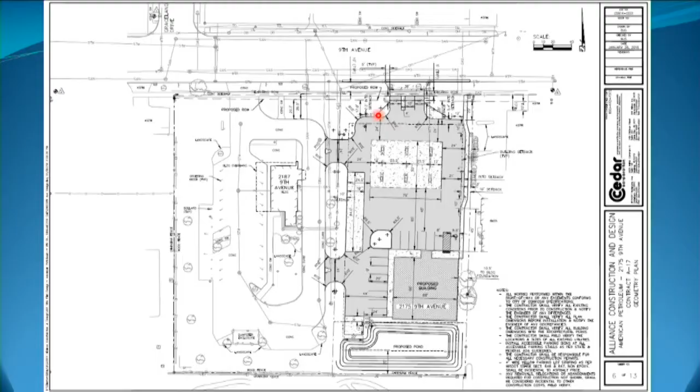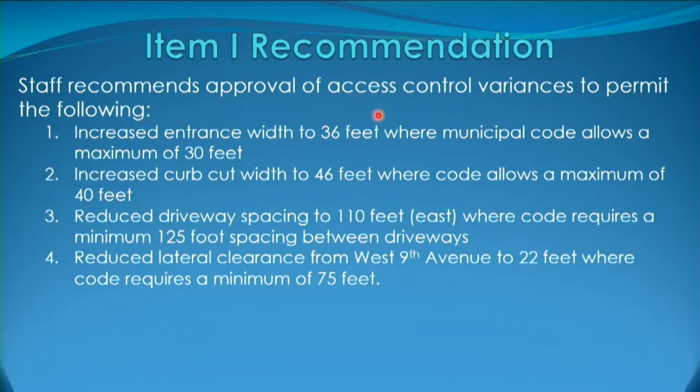Motion to approve. Second. Any discussion on the motion? Seeing none, call the roll. Hintz, aye. Weigert, aye. Perry, aye. Propp, aye. Borsak, aye. Bowen, aye. Wojtek.

Aye. Motion carried. Okay, moving on to item number 2, residential design standards variance to allow window area reduction at 1333 West Bent Avenue. Thank you, Mr. Chairman. Welcome, sir. So this item actually came before the Plan Commission before, at the January 2nd meeting this year. At that meeting, the applicant had proposed reducing the size of the windows. We as staff had recommended denial of that proposal, and then all of you at Plan Commission asked us to work with the applicant to come up with something that could work for both the city and the applicant.

So here's the subject site in blue, single-family residential, SR9, I believe, and everything immediately around it is single-family residential. Get a sense of it right there. And she was looking to modify the size of the windows on the north facade facing Bent, and then on the west facade.

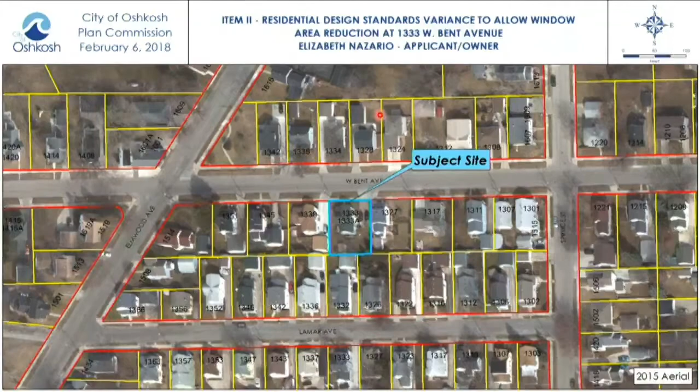This is kind of some images that she submitted, showing the house and then the windows in question. These are some images that I did. So this was the current state of the house here. And then what we were thinking about here, so you get a sense of the size of the windows, and there is a decent amount of reduction. It's certainly noteworthy here. Over here, you notice, if you look, that the window immediately to the right of the door there would be gone. And then this window here would get smaller also.

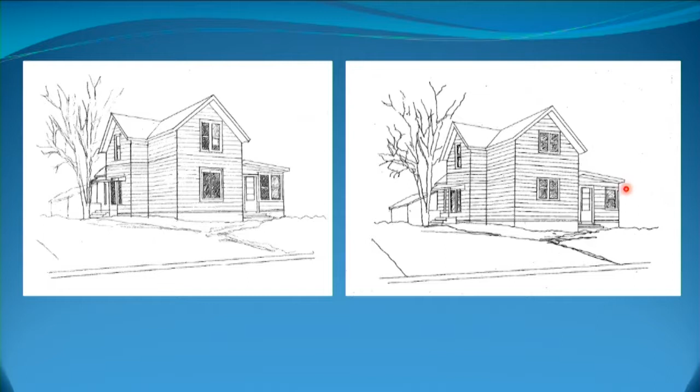And then on the west side, I did not do any drawings of that, but she would have 3 windows of the same size as this one here, double hungs on the west side immediately on the other side of that facade there. These are some existing photographs, or showing existing conditions, I should say. So you can see the exterior there, and then some of the work that she had started on the side of the house here. And then inside here is actually what would become the kitchen space.

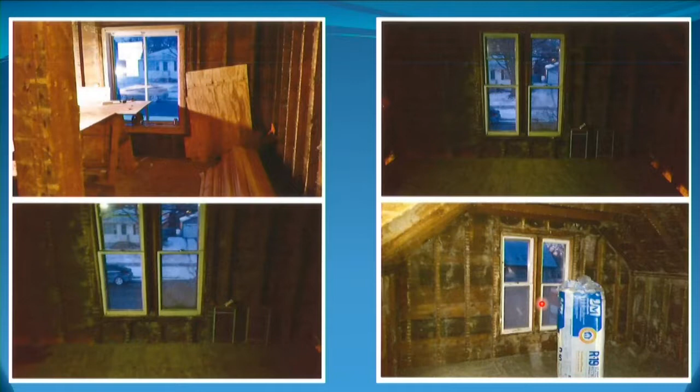So this is the existing, I believe it's a sliding window there. And she wanted to do cabinetry here, raise the sill height of this. And so this window would probably be a similar width, but the sill height would go up a little bit to allow for that cabinetry there. Getting another sense of it there. Same kind of type of image here, but off from an angle there, showing that kitchen space. Obviously there's some materials up here with the work being done, but you get a sense of the size of that window, the sill height there. It's not very far off the ground at all.

And then moving upstairs to the bedrooms, which would have the other window that would be reduced. You get a sense here of the height of the sill there. And she was concerned with the safety aspect, you know, grandchildren potentially climbing up and easily getting to that sill there. She wanted to reduce the size of those windows there and replace those.

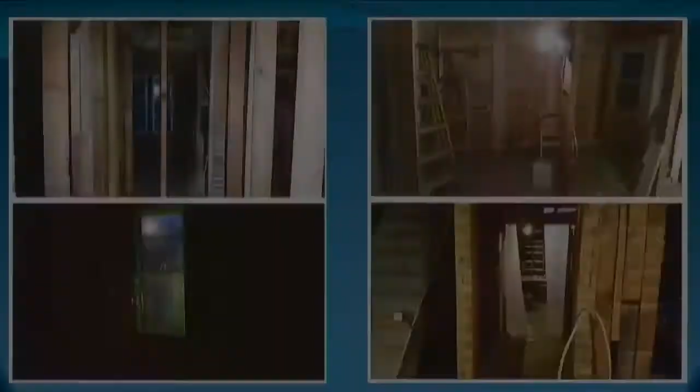Some more images here. There is a central stair that actually restricts what she can do. I wish I could get this cursor to work a little bit better.

So that's looking through this, what would become the stair here. What is the stair? It's just framed here. Everything's been stripped down inside the house. So the sheetrock is gone, the insulation is gone. You're looking towards the bedroom on the second floor here, the existing windows that would be reduced. And then this over here is actually what would become a dining room. And so what looked to have been a porch is now proposed to become a dining room.

These are framed out areas for the 3 windows here, double hung. And then this would be the existing double hung there. And they would all be the same size, same sill height, etc. And then over here, you get a sense of that stair there. Like I said, it restricts what she can do. These spaces on each side of it are pretty constrained. You know, defines those spaces. And we figured that the most logical place for the kitchen would be the front of the house, based on the floor plan. I don't have a floor plan drawn here, but hopefully you can get a sense from the images.

Some more images here. There's that stair from another angle. And then she was going to make this over here a mudroom. I think that's on the east side of the house there. And then you're looking at the west side on the right here.

Here is an isometric view of the kitchen that she is looking to do. So this would be that front facade of the house here. This would be the side east facade here. The window would be obviously in this space here. She might lose a little bit of cabinetry, but we figured that that casement style window would allow for preserving the architectural integrity, but then also allowing to raise the sill height on the first and second floor. And then over here would be the dining room.

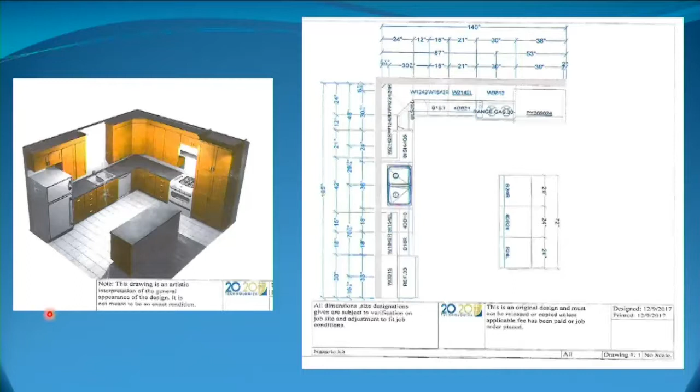This here just kind of hits at that egress consideration that we had to think about. So if you look on the left here, there are some double hung windows, and you notice that basically a 20 by 24 inch minimum clear space would be required. But on top of that, you have to have 5.7 square feet of clear space. So simply having, say, two 24 by 48 double hung windows would not be acceptable for fire egress for the second floor. You'd have to go much wider and much taller in most cases to get that sash to open up to create a space that is 5.7 square feet in area.

If you did a double casement window, or a French casement style window, you could have a 48 by 48 inch opening, which is not shown here, but 48 by 48 inch rough opening where both leaves swing out, and you could get this clear space that's required much more easily. So that just kind of shows some of the dimensions that would be required: maximum 44 inch sill height, she'd be well under that. And then the 24 by 20 inch clear space, 5.7 square feet.

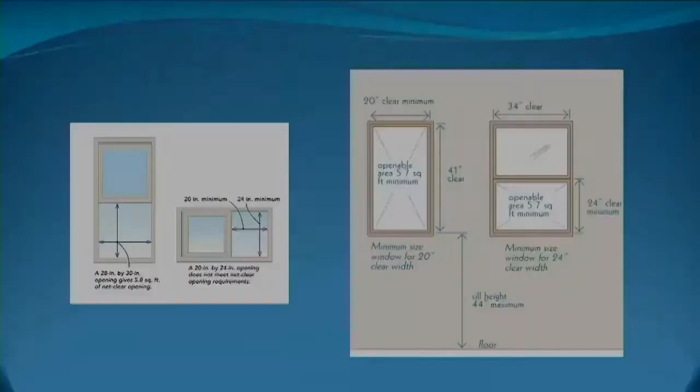The recommendation for this one is staff recommends approval of a variance from the city's residential design standards to allow for the size reduction of 6 window openings and elimination of 1 window opening. And then the conditions would be that the window trim would match the color and appearance of the existing windows on the home. The proposed work would meet all applicable design standards, other than obviously the ones that she'd be looking to receive the variance from.

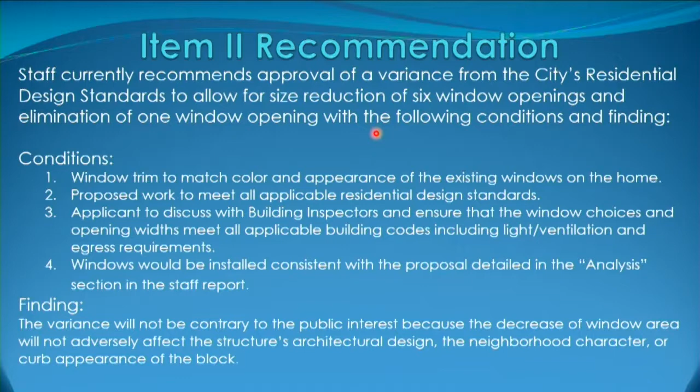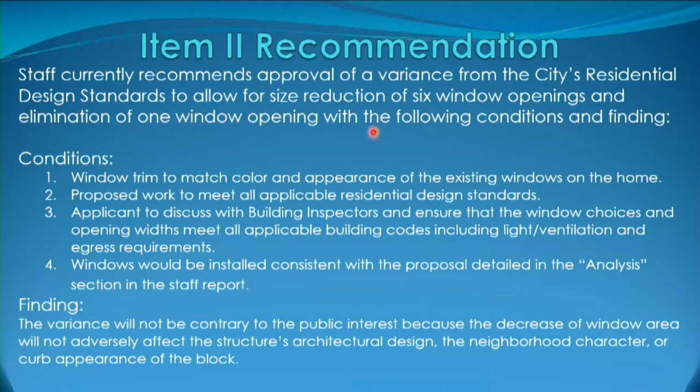And then number 3, she would discuss with the building inspectors and ensure that the window choices and opening widths meet all building codes, including light, ventilation, and egress. And then 4, the window would just be installed consistent with the proposal detailed in the staff report. All right, thank you. Technical questions from the commission?

David? So a general question, refresh my memory, did this construction start before this process? Actually, I believe it did in that dining room area. So if I go back, I can probably show you the part that did. She started remodeling before, but just going back here.

And the only reason for the question is, it seems that that's one of the most repetitive things we see here, in single-family homes that, perhaps with all good intentions, there's a tremendous amount of remodeling that's going on without first consulting the city, and sometimes it puts us in a difficult situation. I don't know how we address that. But secondly, as a general observation, the amount of work that you put into this and the recommendations for the resident, I think are commendable. Yeah, very, very thorough, very impressive.

Thanks. Other technical questions? Seeing none, anyone here from the public to speak to this item today? Okay, back to the commission. Motion to approve with the conditions listed. Second. All right, it's been moved and seconded. Any discussion on the motion? Go ahead, Kath. I just want to weigh in also that, thank you for this superb job, and I'm glad we laid it over. There's a much better product. Thank you. And I would add that we appreciate your patience, ma'am.

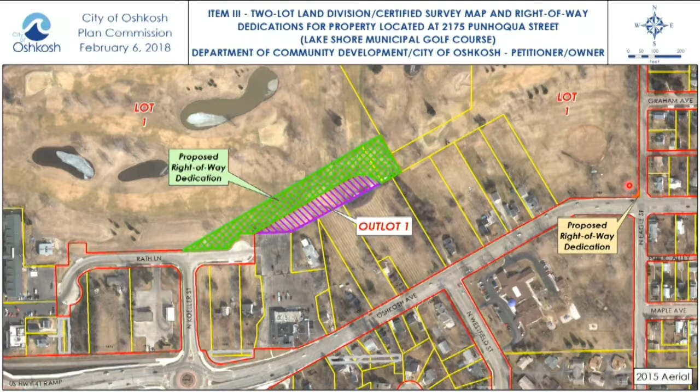These are desirable from a public facility standpoint. It allows for easier installation of wheelchair ramps and traffic signals without the need for easement acquisitions from the neighboring properties. The Department of Public Works reviewed the proposed CSM and does not have any concerns with the proposed street layout. And staff is recommending approval of the two-lot land division as proposed.

All right, technical questions. Kathy and Annette. Maybe silly question. How will this right-of-way dedication allow Oshkosh Corp public access to their site? We still don't have Westfield extended. No, this will be public right-of-way right here. So in the future, this will become a street. I see. At the tail end of their site. Correct. Okay. Got it. Westfield Street's coming. There'll be an official map action coming very soon.

Okay, thank you. Oh, I should mention, I'm sorry, there is a proposed name for the street. It's going to be Four-Wheel Drive. What? Four-Wheel Drive.

Ed, technical question. Why? What was the original name of Oshkosh Corporation? Anyway, Ed, you had... Sorry, well, now I've got different technical questions, I guess. Whatever. Sorry, that's throwing me.

Is there a reason that we're not doing any right-of-way dedication behind the easternmost lots there while we're doing this? I know those are obviously slated, under this traffic impact analysis that we're allegedly going to see someday, for redevelopment at some point. Is there any reason that we're not also doing dedications as part of that portion of it?

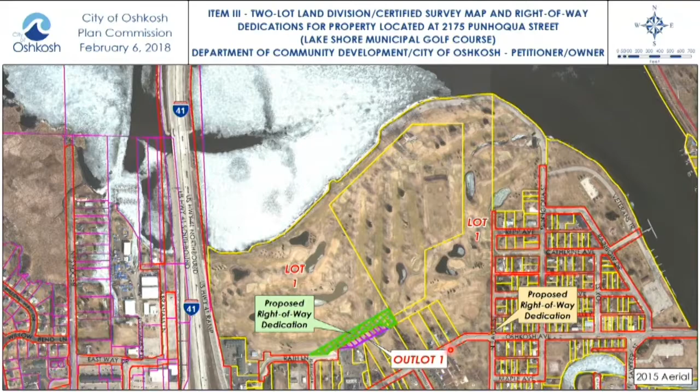All right, moving on to item number 5, plan development for an amended general development plan and specific, oh, pardon me. Number 4. Assessor's plat, Ceape Avenue area. Thank you, Mr. Chairman. Here we go. Okay, the city is requesting approval of an assessor's plat containing 7 single-family lots, which is identified as the assessor's plat Ceape Avenue area.

This is a replat of a portion of Block 30 of Leach's map of the 8th Ward, which was recorded in 1894, and will correct erroneous lot lines that are affecting the 7 subject properties. On the screen is the current parcel configuration with lot lines more or less going through garages, clipping corners of houses, going through driveways, and not consistent with the existing and historic occupational use of the properties.

And then in 1868, on the left side, that's Palmer's addition of Second Ward. Palmer, for unknown reasons, redrew the lot lines so they were no longer perpendicular to Ceape Avenue, but parallel with Rosalia on the east side. Now what this did, let me go back to the photo, it twisted these lot lines by approximately 17 degrees, causing lot lines to go through these structures, and the property owners were unaware of what land was truly theirs or their neighbors'.

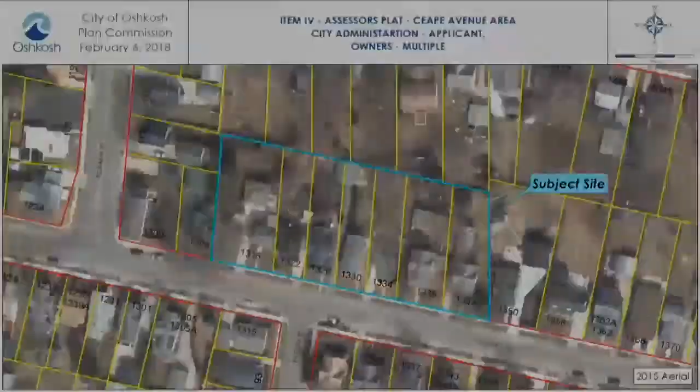And then lastly, on the right side, Palmer's map was replatted by Leach's map of the 8th Ward. He didn't change the orientation of the lot lines. He just more or less carried on the situation.

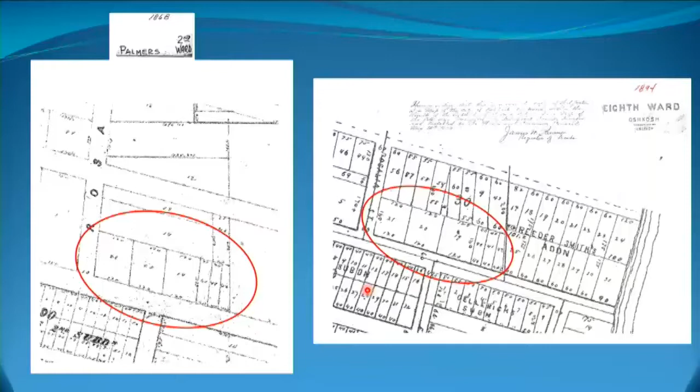The Planning Services Division was approached by one of the affected property owners who wanted to construct a fence on what she believed to be her property line. And then staff explained to her that, in fact, the land was actually her neighbor's. I can show you which one.

Over here, 1334, she originally petitioned this to obtain a building permit to construct a fence along this lot line, and then we explained to her it's technically not her property.

So staff reviewed the situation and determined that the best way to rectify this problem is to have an assessor's plat drawn for these 7 affected properties. Staff from planning and the assessor's office hosted a neighborhood meeting with the affected property owners to give them background information.

And the potential ramifications if the lots continue to remain as is. The assessor's office informed the owners that if the lots remain unchanged, it may be potentially difficult to obtain clear title when trying to sell their homes because of lot lines going through structures, fences, and driveways, as well as continued confusion as to who owns what land among the neighbors.

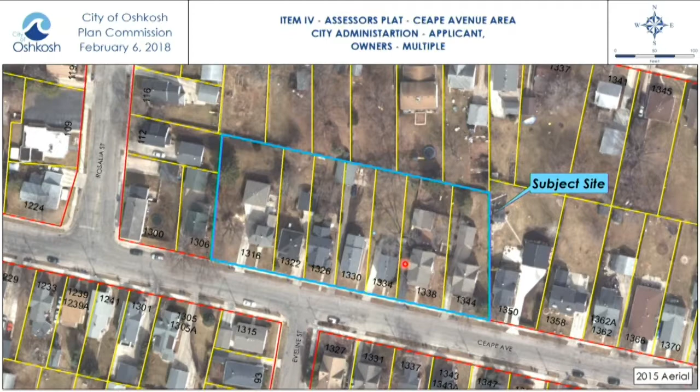After receiving feedback from the owners, staff recommended to the Common Council to order an assessor's plat, which it did in July of 2017. The city hired a consultant, Free Land Surveying and Engineering, to prepare the assessor's plat, and here it is.

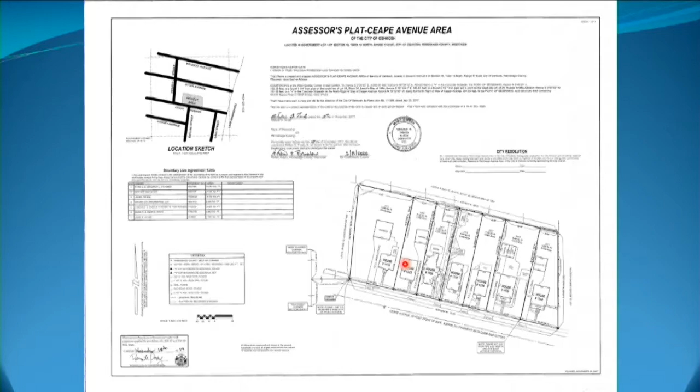The scope of the work included meeting with each of the property owners to determine where the property line should be located based on the historic land use and occupation of the properties. After placement of the new property lines were agreed upon by the owners, the surveyor staked and remonumented the property corners and drafted the plat map, which is up on the screen.

The Wisconsin Department of Administration approved the plat in November of 2017. Then the plat went on public display at the city clerk's office for a statutory required minimum 30-day period, which lasted from November 26th through January 2nd.

Now the plat corrects the nonconforming issues created by Palmer's map, including lines crossing through the structures and driveways, and recreated the lots based on the historic occupational use of the properties. In comparing the assessor's plat to the original plat, the lots are almost identical in orientation and location.

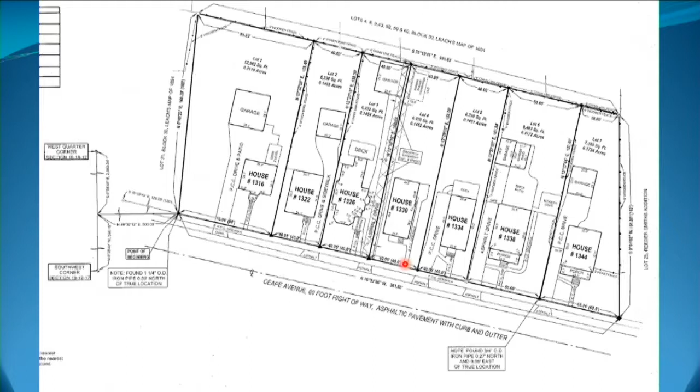And if the plat is approved by the Common Council, it will be recorded at the Winnebago County Register of Deeds, and the lots will be officially changed. So we're recommending approval as presented.

Thank you, sir. Technical questions? Fascinating problem. Long one.

All right, seeing none, anyone here from the public to speak to this item today? Okay, back to the commission.

Approve. Second. Moved and seconded. Do we have any discussion on the motion? Seeing none, let's call the roll one more time.

Hintz, Aye. Kiefer, Aye. Weigert, Aye. Perry, Aye. Crop, Aye. Forsick, Aye. Bowen, Aye. Wojtek, Aye. Motion carried.

All right, now moving on to number 5. Planned development for an amended general development plan and specific implementation plan for an indoor storage facility and outdoor display located at 900 North Koeller Street.

Thank you, Mr. Chairman. In early 2017, the Plan Commission had heard and approved a general development plan for 900 North Koeller. That site included redevelopment of the main building to climate-controlled self-storage, 3 outlots in front of that, and then some accessory land uses for outdoor storage as well.

Since that time, that property has changed hands and a new developer has come in. We've met with this body twice for workshopping this, and at this time they're ready to move forward with an official hearing. So here we have the current land use of the area.

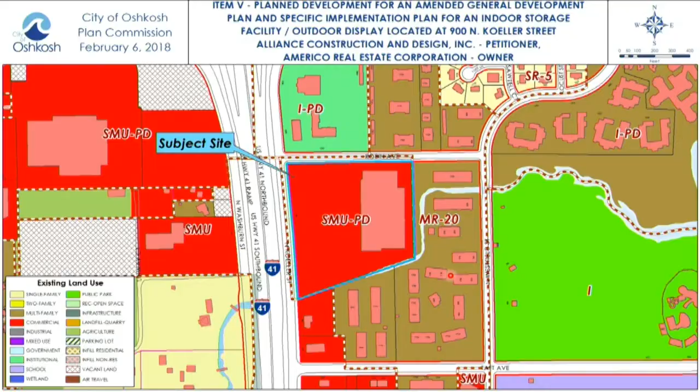Right now it is shown as 12 spaces. Staff is recommending those 12 spaces be held for only vans and pickup trucks, which are 2 of the types of vehicles that the applicant does rent out.

A couple of other modifications: they are showing complete landscaping around the entirety of the proposed outlot. Staff is in support of that outlot and its configuration, with one additional requirement that the outlot have some additional tree plantings around it. Right now, the applicant is showing that it is basically just shrubs surrounding that.

On the street sides of Robin and North Koeller, staff is recommending that be a requirement that it meet our current street landscaping ordinance, which would be approximately 700 points of street trees. That way it would be consistent with what they're doing on the northeast and southwest corners of the site.

They have a vehicle shunting area shown in the center of the site. That is the area where the different trailers and other equipment they rent, their larger vans, would be lined up for rental.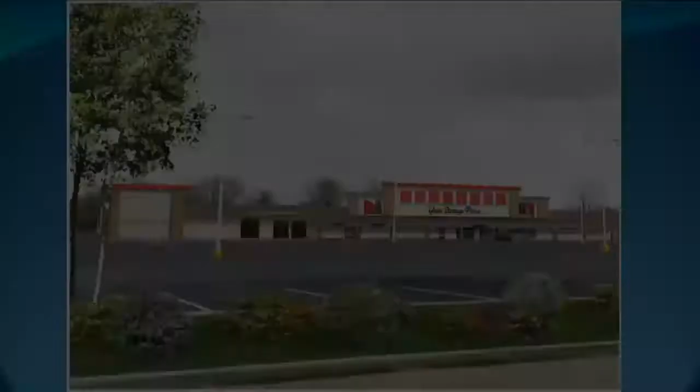Here are just some of the other building elevations showing the sides and back of the building. Both this center tower, for lack of a better term, and these two end caps, are additions to the building to enhance it. Right now it's a pretty plain single-story facade. They're using some roof articulation to help break that up and make a better looking building. The applicant has provided some renderings of what it could look like.

This was the original rendering you had seen previously. As you can see, the outdoor storage had been removed. There's where they're showing some of the landscaping. This is from that northwest corner, viewing down towards the site.

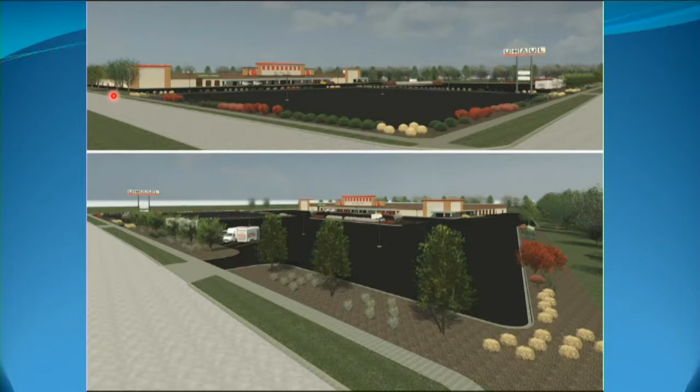They provided two additional renderings. At the top, again, is from the northwest side. You can see the landscaping around that proposed outlot, the tree plantings going along Robin Avenue, the landscape area out in front of the vehicle display, and the landscaping in front of the shunting area.

Moving to the bottom picture, this would be from the southwest corner, where you can see this area where the asphalt would be removed, new curbing would be put in, and this would be their snow storage area to help mitigate some of that runoff going towards the creek. Again, here's the shunting area with the proposed landscaping in front of it, and here is the vehicle display area with the enhanced landscaping in front of that.

Backing up to the site plan, presently there are six access points to the site. The applicant is proposing to keep the southern two along North Colder Street. There is presently one at the very north-west corner of the site that is right now shown as closed, so staff is recommending the closure of that, then it be returned to city standard for curbing. There's a single access point here that is intended to be maintained, presently shown as two driveways very close together.

Talking to the applicant and with the Department of Public Works, we're proposing that be changed to a single access point, class 3 driveway to accommodate the truck traffic.

The applicant has indicated that they only use straight trucks for deliveries. The deliveries this truck dock is generally going to see are for the retail component of their business. Their business has retail, buying boxes, and a rental area in the front of the building, and the truck deliveries are for that portion of the business—straight trucks only, not semi-trailers.

Staff is recommending we put a condition on it to keep it as such. Straight trucks will be able to make these turns without having to back through the street where a semi-trailer may, and city ordinances do not permit backing a truck or trailer into a site.

So staff is recommending approval with a number of conditions, and we'll go through them. The first would be approval of a CSM showing that two-lot configuration, the main lot for the U-Haul and that outlot to be created.

Staff is recommending a cross-access easement be placed between those two lots. That outlot, considered Lot 2, would not meet the spacing requirements for any driveways of its own. So we'd like to see cross-access easements placed so that as that lot develops in the future, it maintains those same access points already out there. In conjunction with that, a vehicle access restriction should be placed along that frontage to make sure no new driveways are placed for that lot.

Full closure of the westernmost driveway, as we discussed, returning that to city standards. Delivery trucks are to be limited to straight trucks only, with no semi-trailer deliveries allowed.

If Lot 2 has not been developed within 3 years, all asphalt shall be removed and returned to a vegetative state. It is our recommendation to give them some time—we want to make sure they have an opportunity to develop it. But if after 3 years that lot has not been developed, we'd like to see the asphalt removed and a little more green space added. We feel 3 years is about an appropriate time frame for that.

A couple of code requirements need to be added to their site plan. We require a minimum of a 4-space bike rack, so that will need to be added to the site. We also require pedestrian connections from sidewalks on any public street to the building, and they will need to make those connections.

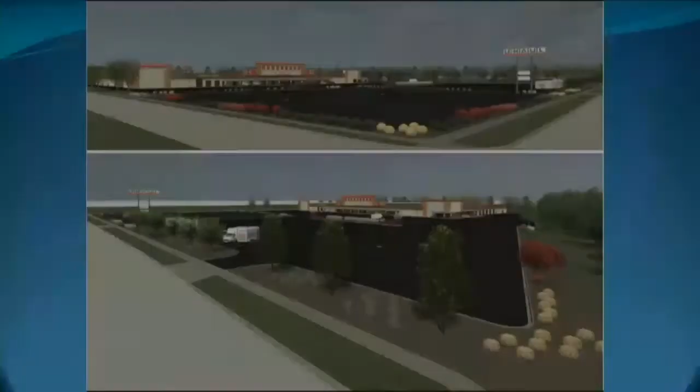Department of Public Works commented that they want to see positive drainage provided for Lot 2. Right now a lot of the site drains southeast of that northwest corner, and DPW had concerns that if we fully berm that in, water would just sit up against the landscape area. So the applicant has worked to provide a couple of cut-throughs where the water can flow through into the currently approved drainage for it, so we don't create a situation of stagnant water or ice in the winter.

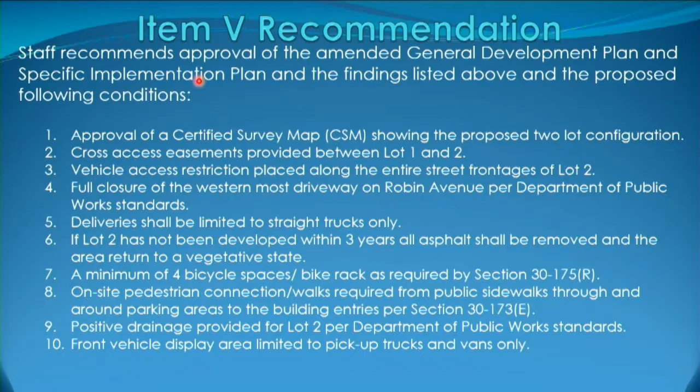We are suggesting that the front vehicle display be limited to only pickup trucks and vans. Any larger trucks or trailers would need to be located in the shunting area, and no outdoor storage would be allowed on the site outside of that designated vehicle display area and the shunting area.

A code-compliant lighting plan must be submitted. There were a couple of small areas just over the minimum 0.5 candle light that they'll need to address as they go through the final site plan review for the site, if it is approved.

Final stormwater and utility plans need to be approved. They have provided some stormwater plans that the Department of Public Works is reviewing, and we want to make sure that process is completed during the site plan review. The applicant is proposing to fall under the 20,000 square foot threshold of new concrete and asphalt, where full drainage plans do not have to be updated. But in the future, when the outlot is developed, both their current site and the outlot would have to be brought up to code, as well as if any reconstruction of the parking lot takes place. Presently, though, they are under the threshold for full change there.

Number 14 is adding additional street landscaping for trees around the west and north side of the outlot.

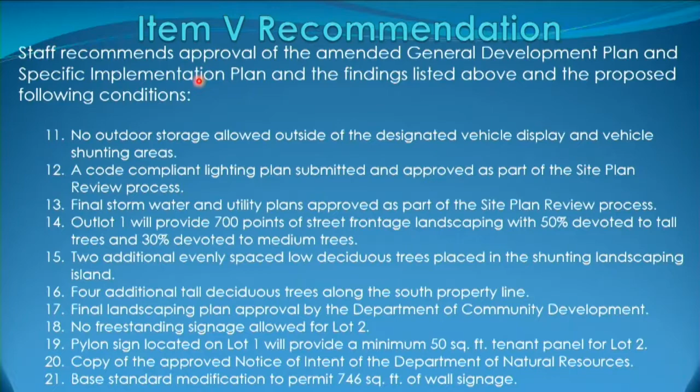Number 15 is adding 2 additional deciduous trees in that shunting area. Right now, the shunting area consists of kind of 1 tree on the north end of it and 1 tree on the south end of it with just shrubs between it. It is staff's opinion that if we added 2 evenly spaced trees, it would help break up the look of those vehicles parked in the shunting area a little better.

Staff is recommending, I'm going to go back to the site plan for this, 4 additional trees be placed kind of along the southwest corner as well. So here's the shunting area where we'd like to see at least 2 more trees placed. And then to help shield the view from the south, we'd like to see 4 additional trees placed in this landscaping bed to help soften that look as you go forward.

Staff is recommending that a final landscaping plan be approved by our department. Right now, especially in the shunting area, almost all of the shrubs are a single variety. We'd like to see a little bit more variety of the plants in there. We would like to have the opportunity to approve that final landscaping plan before they move forward. We are proposing that no freestanding signage be allowed for Lot 2 of the outlot, and that a minimum of 50 square feet of signage on the pylon sign be reserved for that outlot.

Finally, we have 2 more. A copy of the notice of intent for the Department of Natural Resources. Anytime someone starts to do disturbance of this, they have to do an NOI with the Department of Natural Resources. We just want to make sure the city's provided a copy of that. And then finally, the granting of a base standard modification to permit the additional wall signage as proposed.

Overall, the staff feels that there is a lot of softening of this site taking place. It's presently basically 100% asphalt, and they're looking at removing a little over an acre of asphalt and concrete to add to these landscaping areas. Staff feels that definitely will be an improvement to the site, and kind of soften the look of it. All right, thank you very much. Technical questions, David, let's go with you first.

Again, I think that what we had originally, the work that you're doing has gone a long way. And both applicants and your efforts should be commended. I'm confused about stormwater. Yes. You're saying that they're disturbing approximately, was it 44,000 square feet? Yep. Will that not trigger the 20,000? No, the 20,000 is triggered by new concrete and curbing. They are not doing 20,000 square feet of new concrete or curbing.

Okay, where are they right now in the square footage against that? I don't know the exact number. I know it's a little bit below that. Steve, do you recall? The only two areas of new curbing are that southwest landscape area, and then around the shunting area. You know, without getting too close, if you're at 19,000 square feet, they're pretty close, and in that regard, I would suggest that in their site plan, even though they do not currently have to have a stormwater plan, either detention or sediment reduction, it should be shown where they anticipate putting it, so that area is set aside.

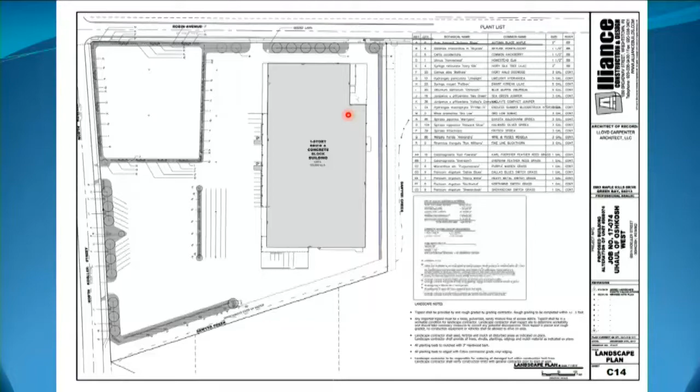Okay. Other technical questions? Ed and John. Condition one is, and this is procedural, I guess. Condition one is approval of a CSM showing the proposed two-lot configuration. We're not looking at a CSM here. So is this just sort of future approval of a CSM? I'm just curious. Yeah, they will need to do a CSM to create this lot configuration as shown. It was similar to what we had done on the original GDP of this site. Okay, so they'll bring the CSM back through to us. Yep, correct. I just wanted to make sure I wasn't reading it wrong.

John? And I just wanted to clarify, the 400 square feet for the pylon sign, that's the top part and including those bottom sections that they're putting in also? Correct. Yep, total square footage of 400. And what was it, 50 square feet, I think, that you recommended, is for the outlot in the future? Correct. Okay. Just wanted to make sure. Kathy?

If snow is gonna be stored on that southwest corner, and it's going to be curbed, it's still gonna have to drain somewhere. Does it drain into Sawyer Creek around the curb? How does that work? The site has numerous inlets in it today that it drains. Basically, the parking lot has depressions scattered throughout it. I believe there's 6 or 8 of them. I would expect that this area would be draining to one of those inlets and draining through there. The big issue we're having is that with the current snow plowing, they're actually pushing the snow over the bank and into the creek, causing damage to the bank and potentially plugging the creek if too much snow gets pushed over. That's why we want it in the curbed area to basically contain that pile of snow, force it into the inlets so that it drains. We're not having piled snow sitting in the creek itself. Okay, thank you. As someone who lives near Sawyer Creek, I appreciate that.

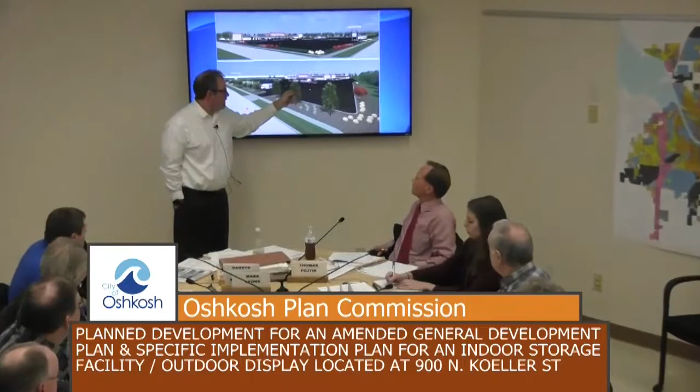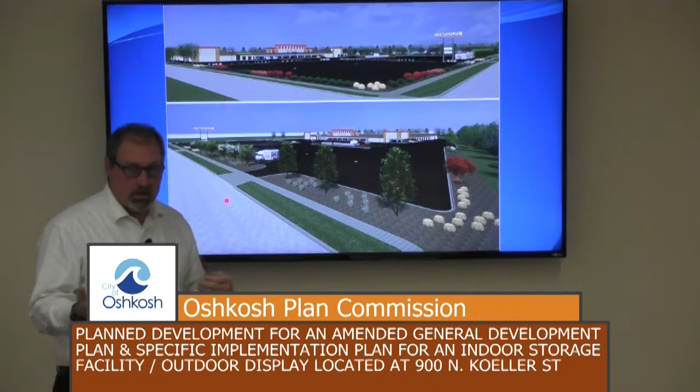A more intensive screening of that, whatever it is, 4 lanes. Get back to that screen once, Mark. You want the rendering. Yeah. What we weren't trying to do is block it visually, the whole thing, like maybe even a fence would do. What we were trying to do is put some elements in here that are just gonna break up that mass. So we thought a tree here and another 2 trees in here, along with the shrubs, would break up the mass of the vehicles, because it'll create an area in front of those. So that was our recommendation. Your recommendation is taking it in a different direction, if that's the way the Plan Commission wants to go. Yours would create more of a wall along there. We weren't trying to create a wall. We were trying to landscape the vehicles and have something in front of the vehicles, but still allow you to see some of the vehicles, while taking out some of that mass.

Other thoughts? I think they've gone a long way toward satisfying what we want, and I'm ready to support this now. And I don't think we should wall off this shunting area with arborvitae, because they are, of course, trying to promote that. So the trees and shrubs that the staff is proposing, I think, will help soften it. So I want to thank them for working with us.

Are we time for a motion yet or not? Yes. I'll make a motion to approve with conditions. I'll second that. Any further discussion? Go ahead, John. I just want to add on to what everybody else has been saying. I think it's great how far they've come with the staff, we were so far apart at one point. And them working with the city, the city working with them, coming out with something like this.

This is how we're supposed to develop, especially in this area, so. I appreciate it.

I have to comment that when I taught my kids to drive, I first took them to that parking lot, where there was nothing. It's good for that. It's good for nothing else. This is a huge improvement over. You couldn't hit anything in that parking lot. University had some good lots too, though. Yes, I also recommend the cemetery. I do love it. Riverside Cemetery is also excellent.

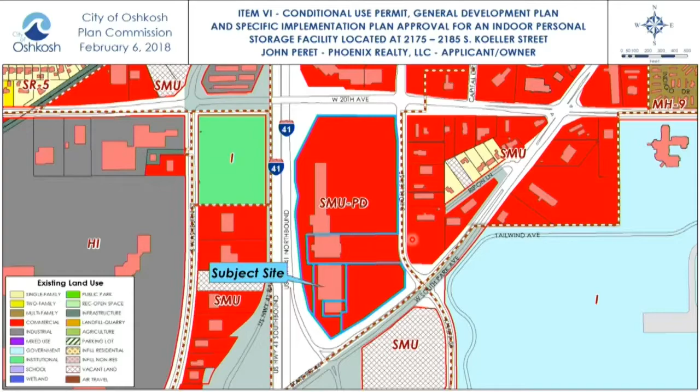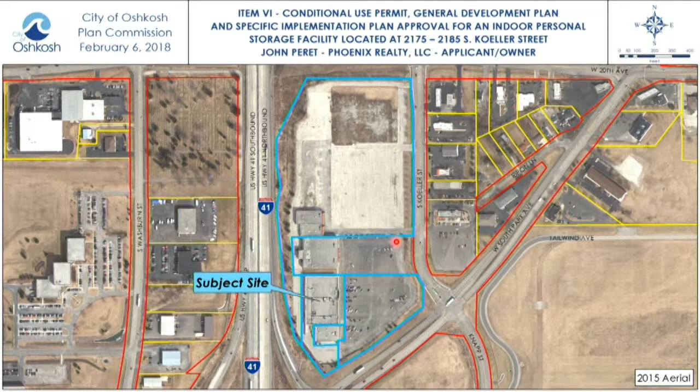So this is just an aerial of the site, just to reference. This is the Rogan's property. And then this is the old J.C. Penney's and Miles Kimball. Right now, it's presently 3 lots, and it does not have any direct access of its own. It is accessed through the shared drive access immediately to the north of these parcels. And just a little closer up so you can see the site. It is a largely impervious lot today.

Up here is the site plan for the facility. The applicant only needs about 12 to 15 parking spots. So they're looking at providing those on the south here. On the south, they're proposing to add a new entrance into the building. It'd be both an overhead door and a pedestrian style door. And then the remaining parking required will be made up with newly striped parking here, where they have 2 more entrances into the building.

A couple of the changes they are looking at making: right now, there's 3 loading docks that all service basically semi-truck traffic. The applicant has a mixture of commercial users and individual residential style users. They don't feel the need for 3 loading docks, so they'd like to modify 2 of those loading docks to meet the variety of traffic they're going to see, anywhere from somebody with a pickup truck to a box truck and the semi-truck, because they do have some commercial users that rent space from their facilities. So that would allow them 3 different styles of delivery traffic for their facility.

The site had a previously approved landscape plan along this south and southeast side of the building. A number of those shrubs have died off over the years from when this development was originally done. So the applicant is looking to restore all of the landscaping that's missing and bring that back up to code.

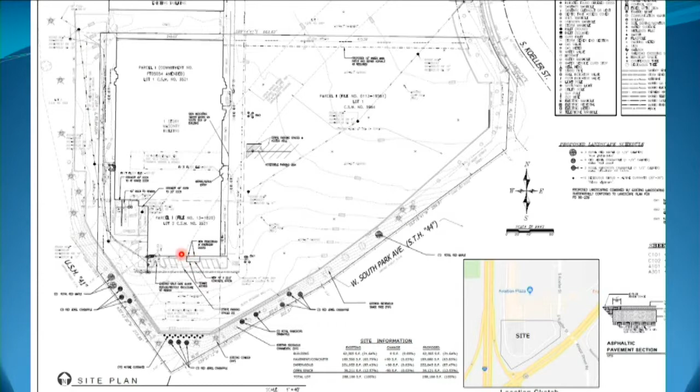I'll just zoom in a little bit. So here are the 3 truck docks. They would be converting, I believe, this end dock and then this 3rd dock over here. Here, a little closer, you can see they're proposing a new overhead door and pedestrian door.

So some elevations. Applicant is looking at just doing some minor modifications to the elevations, some coloring changes to more meet their corporate branding, and then 1 sign on each of the east and west facades of the building. Both signs shown are in compliance with what the zoning code would permit for this district. Here's where you can see they're proposing that additional overhead door on the south facade and that pedestrian access door.

Staff is recommending approval of this with just a couple of conditions. The first is that they combine those 3 parcels into a single parcel. It's consistent with what we have done with a lot of the other projects of this nature where you have multiple parcels.

Evidence of or creation of cross-access agreements. We just want to make sure, given that their entrance is not physically on their property, that either they do have the cross-access easements already obtained, or they need to work out new cross-access easements to maintain that shared circulation of the larger development area. And then final landscaping be approved as part of the site plan review process. Again, as we get to that site plan review, we just want to double check that landscaping and make sure it is all code compliant.

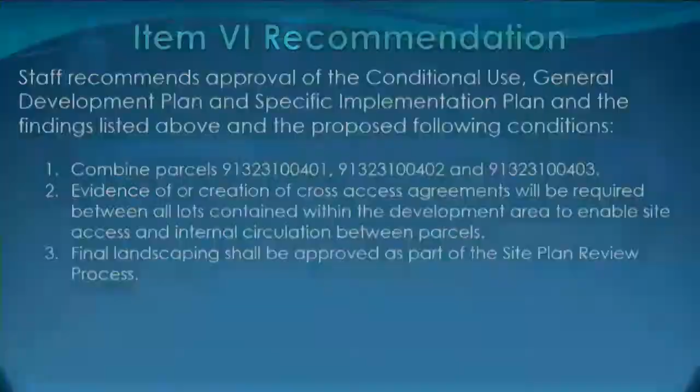Great, thank you. Technical questions? David? Can you just go back to the parcels so I understand what we're talking about, what we're combining, please? Yep. Okay, so it is this large parcel with the parking lot, this parcel with the J.C. Penney's building, and then it wraps around, so this is 2, and then the Miles Kimball site is the 3rd, so it'd be these 3 parcels.

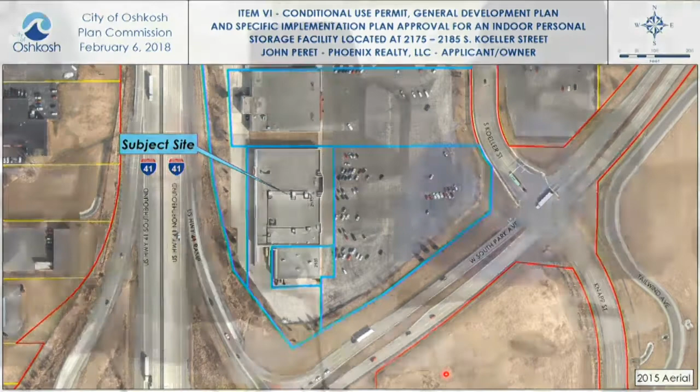Okay. In that regard, they will take care of updating the landscaping that has fallen into disrepair, if I understand the condition. Yep, they will be updating all the landscaping that is missing on the property they own, so basically from here around. Is this our opportunity, or is there an opportunity, to have additional landscaping there, as it's certainly one of the threshold areas of the community? And secondly, is there any consideration of any kind of landscaping in the parking lot?

So at this time, the applicant is not, and they're here, Nick may be able to speak to it further, sure exactly what the end goal for the parking lot is, of what they're gonna be doing with it. It is definitely the plan commission's purview, if you do wanna see some landscaping put in there, and same if you feel additional landscaping along that perimeter could be warranted, this would be your opportunity to do that.

And just to follow up, even though I understand there's apparently 3 different owners in that whole complex, is there similar disrepair of other landscaping that should be followed up on? Yep. Part of what staff looked into as this project was coming forward is we will be ordering in the landscaping in some of these other areas that has fallen to deficiency.

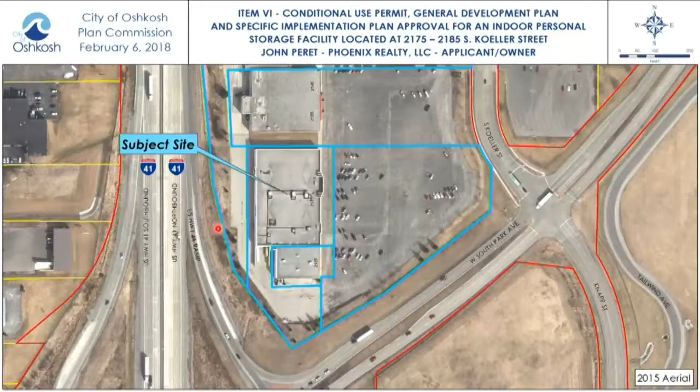Other technical questions? Go ahead, Kath. Looks like 370 units within this building. Wow. And it does say that it would be accessible via semi-trailer, short trucks, and personal vehicles, because it would have to be if you're going to be storing stuff. And I'm assuming there would be adequate ventilation for people literally driving into the center of the building and then driving out again somewhere. So that traffic is designed for these 3 different loading bays.

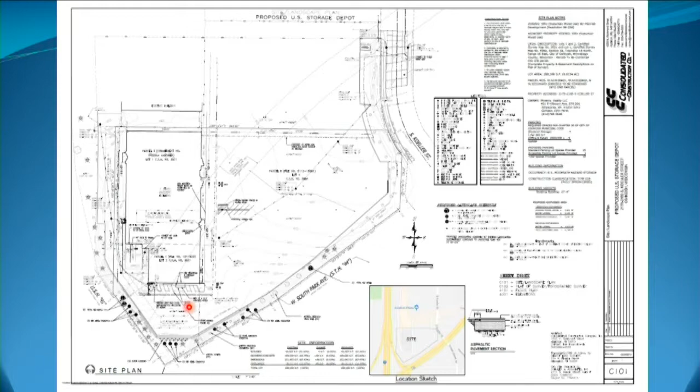Okay, but that's why they want to modify 2 of the existing semi-loading bays, so that semi-trucks, short trucks, and pickup trucks can all access that loading area, because right now they're recessed loading bays, so you couldn't get a pickup truck in. Okay. So nobody would be driving into the building, but somehow they're gonna be able to basically unload stuff onto little mini truck things, push trucks or something. Is that how people get their stuff to their 370 units? The applicant's nodding their heads. Okay, they can come tell us. Other technical questions?

Okay, seeing none, anyone here from the public to speak to this item today? Come on up, sir. Good afternoon. Ken Kozakowski with Consolidated Construction, 4300 North Richmond, Appleton, Wisconsin. I'm here as a representative along with Phoenix Realty to answer any questions and to pick up on that: yes, the loading docks would have trolleys or carts to take things in. If there were to be any traffic going through the building at some point, that would definitely have to meet ventilation requirements per the state code, so that would be addressed if that ever came about. But at this time, that's not part of this.

Okay. Do we have other questions for the petitioner as long as he's up here? Go ahead, David. Would you or the owners have any problem with perhaps having a little more intensive landscaping along Highway 44 and the property that you control?

Hi, John Peret. I'm representing Phoenix for this property. As of right now, we're kind of unsure what we want to do with the parking lot. So if we start breaking things up in the parking lot or anything in the future, we'd want to address that landscaping at that time. During this project, we were just trying to bring things back up to code, put some more life into the property, get a little bit of traffic in there, and figure out what we want to do going forward from that point.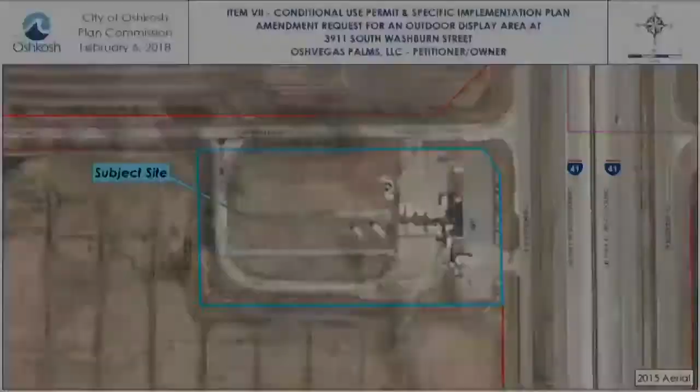Okay, so here's the subject site. It is located at the southwest corner of South Washburn Street and West Ripple Avenue and zoned SMU PD. It is home to Osh Vegas Palms Resort RV Park and Camp Store. A CUP and PD were approved in 2007 for the RV Park and Camp Store, and amended in 2009 and 2010. In September of last year, Planning Services issued a correction notice to the property owner for placement of structures at the site without prior approval.

There are some sheds located at the southeast corner of the property here. The petitioner then submitted an application for a CUP PD amendment to allow an outdoor display area for storage units, as shown here in their site plan. According to the applicant, the storage units range in size from 8 by 10 to 12 by 24 and are made off-site and then transported to Osh Vegas for display or delivered directly to the customer. The purpose of the display area is for potential customers to see the structures in person before buying.

Staff is not supportive of the request for the outdoor display area, as the proposed location is on pavement that was supposed to be removed, and also appears to be in the front setback area. Compliance with the existing CUP and PD conditions and approved site plans should be met before considering additional uses for the site. Staff also does not feel that an outdoor display area fronting South Washburn Street is an appropriate use when considering the character of the corridor.

Staff recommends denial of the conditional use permit and specific implementation plan amendment for an outdoor display area as proposed. Okay, thank you. Technical questions?

Is there an area on site where you feel this would be appropriate? One of your objections is that you don't think it's appropriate to have it located within that Washburn Street setback, correct? Correct. So is there an area that you feel staff would be comfortable with if you did move it, or do you just not want it on site at all?

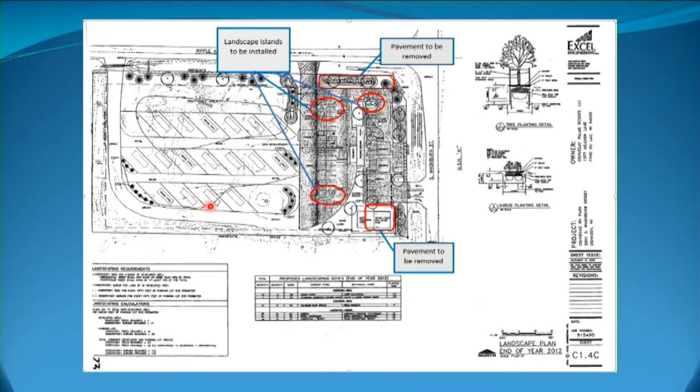If you went to the picture before, is that showing those driveways as paved? And are they paved? I would take it that this is an engineering drawing from 2012. Well, one of them looks paved, but the one in the middle certainly doesn't look paved, it looks like gravel. This one looks paved, that one kind of looks paved, but I can't tell.

Okay, I don't know if Brian saw that when he was out there. No, not when I was over there. And I'll save my editorials. Other technical questions?

Okay, seeing none, anyone here from the public to speak to this item, come on up, sir. Tell us what you know.

I'm Marty Shibboleth, 1077 Meadow Lane in Fond du Lac. I'm the owner of Osh Vegas Palms.

If you go back to the original, the rear of the building that is supposedly in question, there are two landscape islands evidently that were put on there. We've given the layout of that back parking lot, and again, please remember this is a campground and it's home to big rigs. So that back parking lot, RVs pull in and park in a north-south direction. So the two islands that were originally planned, I believe, took up roughly 200 square feet in total space.

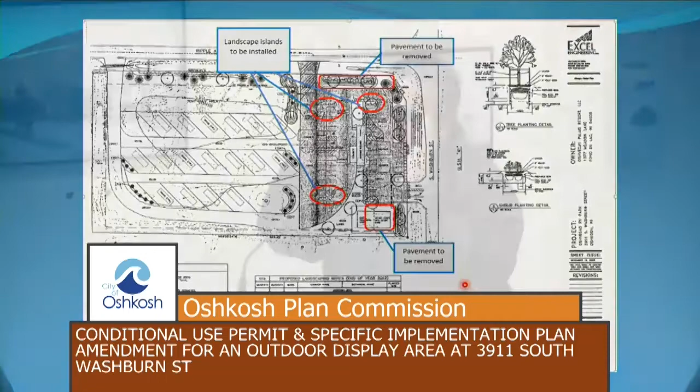They're not damaging any landscape area. If we would have put the berms where they are circled right now in that back parking lot, there would be no way you can get a 45-foot motorhome pulling a 10 to 12-foot trailer in and out. So we modified to put a landscape berm all the way down the middle so they can come on either side of it. If you would have put them right in the middle, you would have had damage both to my property, but more importantly and more costly, damage to their vehicles, and when you're talking $400,000 and $500,000 rigs, these trees that we put in are 13 feet minimum height, which is roughly the height of your standard RV or camper. So right now when they pull in, they're not hitting anything.

But instead of putting 2 landscape berms, one on each end, which would have been a nightmare trying to get vehicles in and out of there, we opted to go north to south with one long berm that in essence added almost 3 times more landscape with trees, with bark mulch around the trees, and in my opinion, adds way more character.

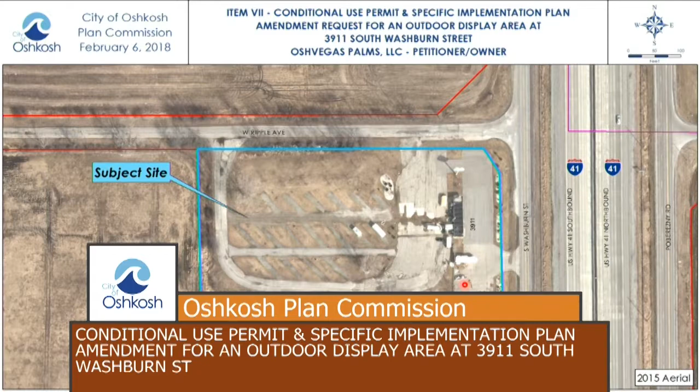And where is that? Sorry, I'm just having a hard time. That's 2015, that's on there. So this is your main entrance in. We took out driveway there, took out driveway there, took out driveway there. This is the building.

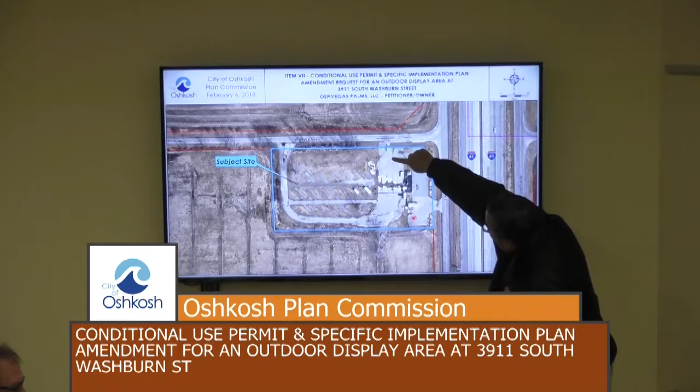So right about where this line comes, which is about where they wanted one landscape berm here, one landscape berm there. When you're bringing a rig straight in to get down this middle row to park, they would have been running into the 2 berms. So what we opted to do is we dropped in, roughly a 200-foot stretch all the way down that's open, tore all that pavement out, and then we dropped in 7 more trees. So now they come on either side of it. Instead of having to maneuver around 2 berms, they're coming down either side, right down the middle of our back parking lot.

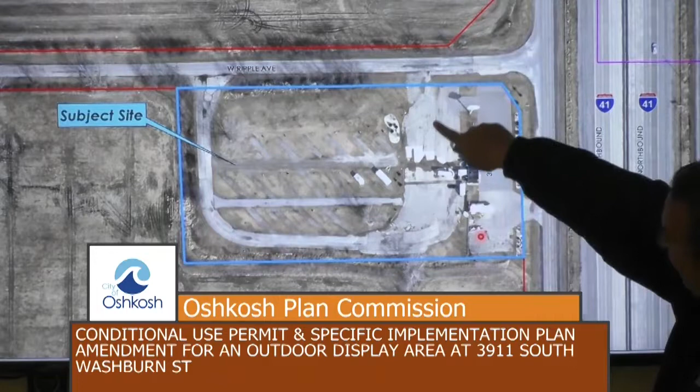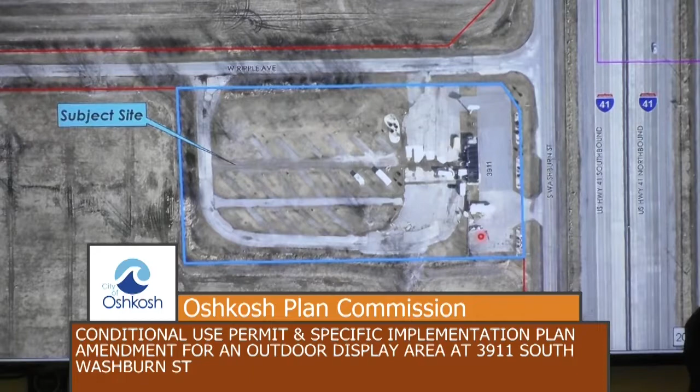So was that different from what was initially approved on the plan? It was different in the size of the space, yes. Okay, well, I think that's sort of the crux of the issue here, that one thing was approved and in the field something else occurred, and that's why we're looking at this as a non-compliant type situation. Maybe there is a functional rationale for the stuff that you did, a reason it couldn't have been done that way. I don't know, I'm just trying to understand it, because it seems like one thing was approved and another thing was done. If there was anything, I didn't realize, looking at the fact that we were tripling what was requested of us with the landscape berms, we put in one long landscape trench.

Is that it right there? That is. Sure, okay. Those are power utilities all the way down. And then you've got mulch going all the way from front to back. Sure.

I get what you're saying, that you tripled it, but it's not what was approved, and therefore it should have been amended. We've done this on some other stuff before - amended a plan for a major change, twice. That was already done.

Is it possible that this comes back surveying existing conditions and understanding the rationale for some of that, instead of an immediate enforcement action, just saying let's figure out what's there, let's figure out why it was done, and let's see if that can mesh under the code. If there's a rationale for it, fine, but if there's something that needs to come out, it's got to come out.

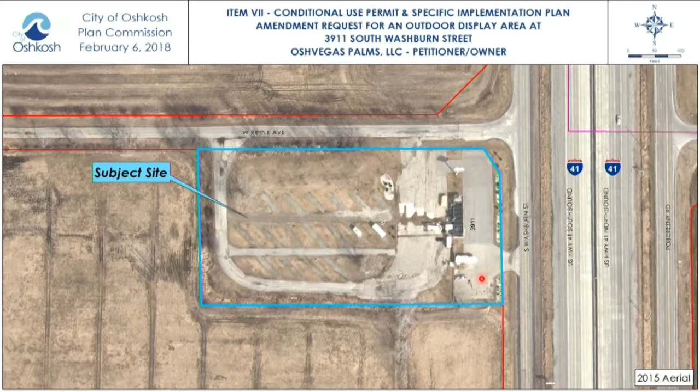Generally, because it's just, I don't know, we'd have to look at the code. Generally, we don't like... Sure. Yeah, no, I understand. I guess I'm just trying to understand what the code actually says, what we're actually trying to regulate. And the code has changed. Remember, the code has changed since the last time we looked at this. Yeah. So, John, you have... Well, then.

I could ask, is there a possibility of just putting it out there to lay this over, to get a little more communication, to see if there is something to present to us as far as a location, and if this is acceptable? And would the staff be amenable to that? Staff's amenable to anything. Yeah. Done. We have had a great working relationship with Mr. Birch in the past, so. David and Kathy have a response for that.

You know, I appreciate what you're trying to broker, but it's not going to change my view that this doesn't belong in the front yard, again, on Highway 41. If they want to have it, you can have it in the back of the facility. Consolidated looked a lot better than your place. So this is not an enhancement, this is not the kind of development that I want to see there.

In the past we had pointed to similar larger buildings that were down in Fond du Lac where they were just plopped down without being on foundations. We worked through that situation on Highway 45 by the fountain. At least in my mind, it's delaying the inevitable, that this doesn't belong in the front yard of a Highway 41 facility. Yeah, which I think could be part of the discussion. Hey, Kathy, you had a comment?